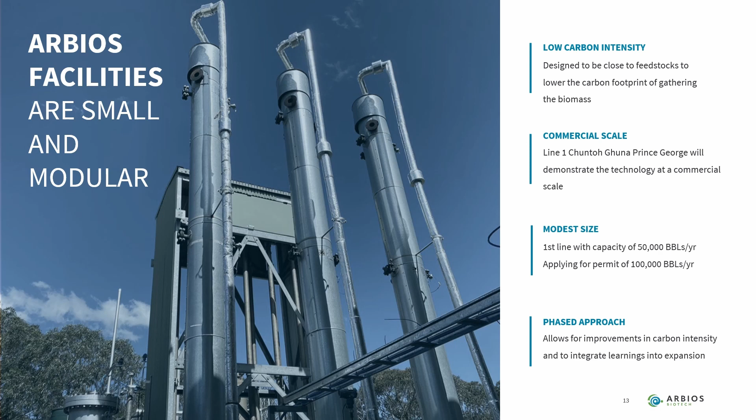The first section is the biomass storage and handling area. Here, there is a small biomass storage area, covered conveyors, screens, magnets, shredder, and a dryer. All of this equipment is focused to create a uniform quality feedstock.

The second section uses small boilers to produce supercritical water at high temperature and pressure, which is then combined with the feedstock into the Cat-HTR to convert this low-value biomass into a high-quality bio oil.

Then, in the third section, the produced bio oil and residual water are separated and stored. For this stage of the project, this is where our process will end. The stored bio oil will then be transported off-site for refining or further upgrading to produce biofuels that can be used as a drop-in fuel for transportation.

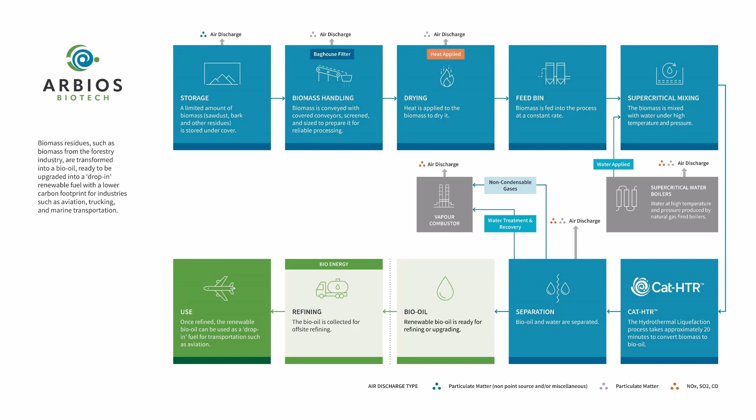And the reason for this presentation is to highlight that we are in the process of applying for an Air Discharge Permit with the BC Ministry of Environment and Climate Change Strategy. We submitted a preliminary application in March 2022 to initiate this application process.

Since then, we have made a number of process improvements, specifically related to controlling dust emissions, which will be reviewed in the Best Achievable Technology Assessment. And as such, our final application will have an updated discharge factor form.

It is worth noting that the process areas and core technology occupy a small section of the site, even with the completion of the planned expansion.

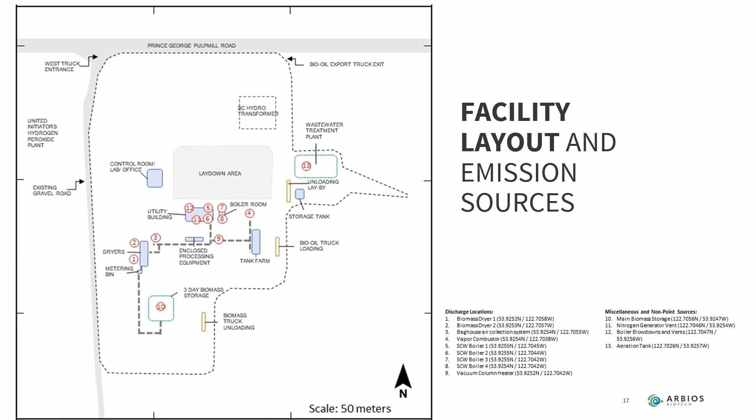At this point, I'll pass the presentation over to Francis, who will discuss the Best Achievable Technology Assessment that WSP has performed for Arbios. Thanks, Francis.

Thank you, Ian. I'm Francis Rees, and I manage WSP Canada's Air Quality and OHS group in BC and the Yukon. I'm going to provide a high-level walkthrough of the Best Achievable Technology, or BAT assessment that my team conducted for the Arbios facility.

A BAT assessment is sometimes required by the BC Ministry of Environment and Climate Change Strategy as a component of waste discharge permit applications.

BAT assessments look at the operation of a given facility and identify discharges of contaminants to the environment. For each discharge, the assessment reviews control technologies that have been proven in commercial application and whose risks are known. The assessment then determines which technology is best suited to meet waste discharge standards for protection of the environment and human health.

The assessments focus on 4 key assessment criteria: the feasibility of a given technology, given the design criteria and constraints of the facility; long-term reliability of the technology under a range of operating conditions; effectiveness of a technology at controlling contaminant levels; and cost effectiveness of the technology in terms of both cost per unit reduction and cost relative to overall facility capital and operating costs.

In performing the BAT assessments, we look at applications of control technology in other similar types of facilities, and we review what types of technologies are required in the permitting of similar facilities in BC. BAT assessments are often paired with air dispersion modeling assessments, which focus on predicting the impacts of discharges on the receiving environment. Brian will speak about the dispersion assessment conducted for the Arbios facility later on.

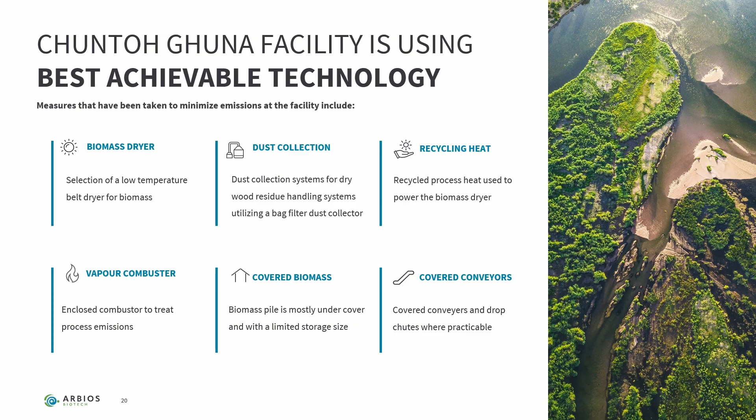In assessing the technologies reviewed on the previous slide, and assessing other operations within the facility, WSP undertook the assessment process discussed earlier, looking at the feasibility, reliability, effectiveness, and cost effectiveness of each control technology.

In approaching the handling of fugitive dust within the facility, WSP determined that rather than handling fugitive dust emissions with a particular technology, it is best practice to manage these emissions via a fugitive dust management plan, which includes a range of monitoring activities, triggers, and actions to manage dust emissions.

With respect to the handling of dried biomass, as mentioned on the previous slide, Arbios plan to employ a collection system for dust from dry biomass. The best achievable technology for handling such dry biomass particulate emissions is a bag filter dust collector, with a typical operating parameter of 20 milligrams per cubic meter or better in discharge concentration.

For the biomass dryers themselves, best achievable technology was determined to be a low temperature belt dryer, as previously indicated. In addition to minimizing emissions of particulate matter, this type of dryer also minimizes combustion emissions because no combustion of biomass or other fuel such as natural gas is required to perform the drying. The low temperatures of this drying approach will also minimize emissions of volatile organic compounds.

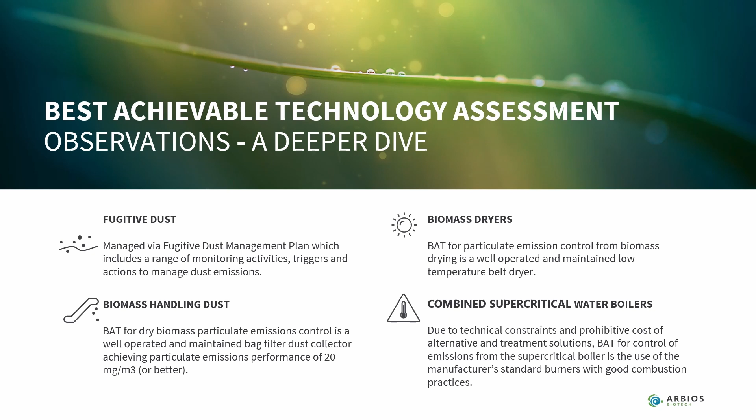The best achievable technology for the vacuum column heater, which is part of the separation process after the CAT HTR, is the use of manufacturer's standard low NOx burners together with good combustion practices.

For handling of vapors from the process, it was determined, based on the BC Oil and Gas Commission flaring and venting guideline as well as industry practices, that best achievable technology is the use of an enclosed combustor, with the important parameter that it must achieve greater than 99% destruction of the waste gases being combusted.

Leaks from process fittings, flanges, and valves within the facility will not be managed by one particular technology, but similar to fugitive dust, should be managed via a preventative maintenance program, which includes leak detection and repair of equipment that contains gases or high pressure liquids.

Finally, based on standard industry practice, best achievable technology for the control of emissions from wastewater treatment is the use of an anaerobic wastewater reactor, with all off gases from the reactor treated in the vapor combustor, as previously discussed.

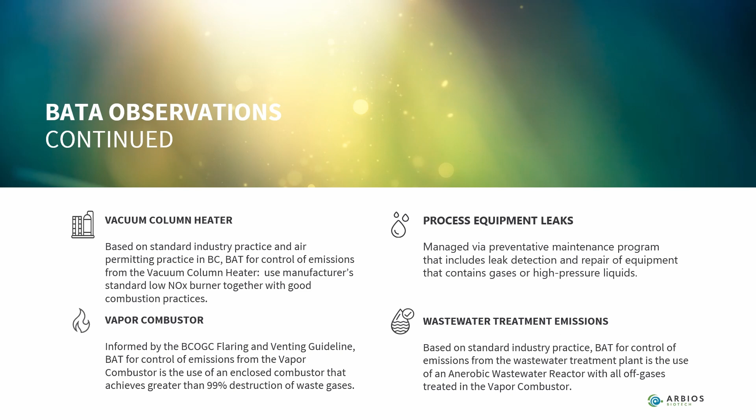That concludes my summary of the best achievable technology assessment. Now, I would like to pass the presentation over to Brian McEwen to discuss the air quality technical report.

Thank you, Francis. My name is Brian McEwen, and I led a technical team from Asenco to do an air quality assessment for the Chuntoh Ghuna facility.

This assessment is twofold. One is to assess the emissions expected from the facility, which we've already heard about from Francis - not just what the emission rates are, but also how they're released into the atmosphere. The second part is an atmospheric dispersion model, an approved government model that represents the weather and the release of contaminants into the air and how they transport and disperse.

So air dispersion modeling is what I'll be talking about mostly. Now, the model requires representation of the Chuntoh Ghuna facility emissions by themselves, and then addition of what's called a baseline or background air quality. This background air quality is taken from existing monitoring data, in this case the Plaza 400 monitoring station in Prince George.

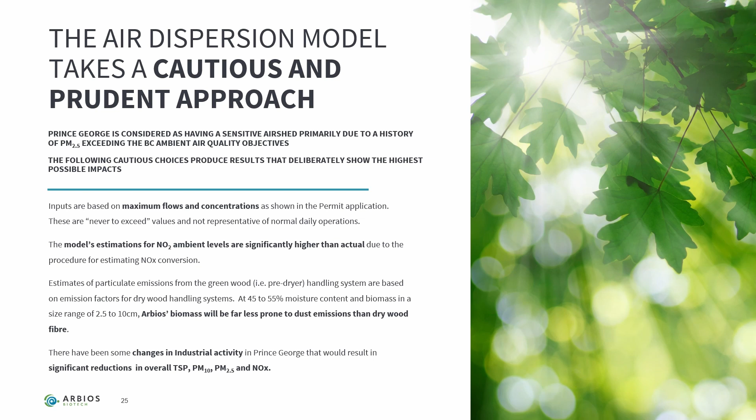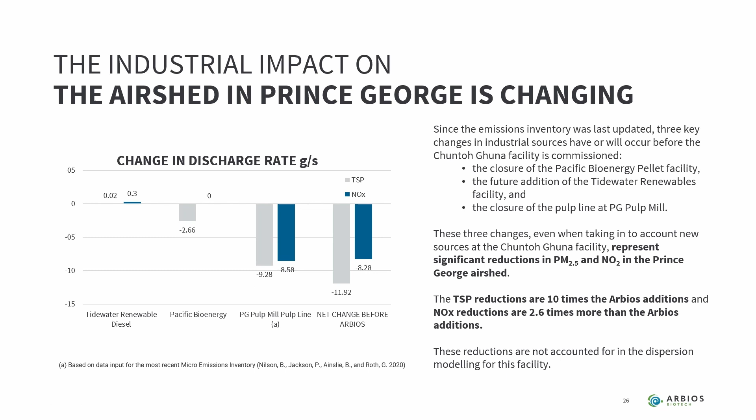So the net effect of recent changes in emissions is a decrease of almost 12 grams per second of particulate and over 8 grams per second of NOx. These reductions are quite a bit higher than the contributions from the Chuntoh Ghuna facility. So we'll talk a little bit about what effect we'd expect that to have in reality versus what the modeling implies.

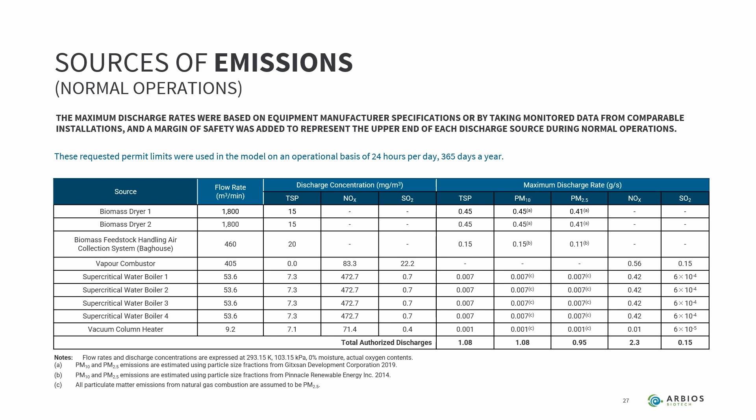So these are the emission rates that are put into the model, and the model simulates the advection, the movement of contaminants and dispersion of contaminants, leading to predictions of air quality concentrations.

Now, the emission sources are well understood in Prince George, in part because there's been a multi-year study conducted by the PG Air Group and facilitated and contributed to by UNBC. These emissions have been modeled as well. Now, the modeling that the university has done has not been a worst case or regulatory model like we've conducted here, but rather a modeling of the typical or the actual emissions.

So there are differences in what the UNBC model has predicted in past years compared to what our modeling here would imply. Notably, the UNBC model predicts lower concentrations because it does not use maximum permit level, never to be exceeded emission rates.

What's important to note here is that the contribution from the Chuntoh Ghuna facility at the maximum rates is about 2% of total emissions or less. And these are at the maximum emission rates. For typical emission rates, we'd be looking at more like half these numbers. So again, back to PM2.5, the typical PM2.5 emissions are expected to represent about 1% of the total PM2.5 emissions in the airshed.

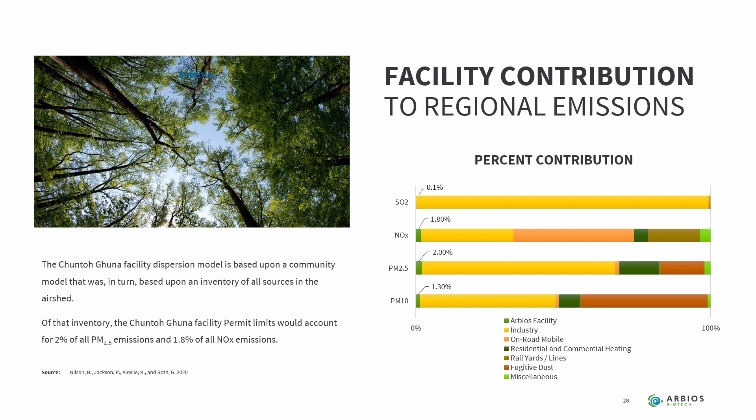The background levels that are added, and you'll see this coming up in our report as we go through the contaminants, the contribution of the facility tends to be rather low, but when the background is added, there can be predicted exceedances. This is because the background in some cases is quite high with respect to the objective.

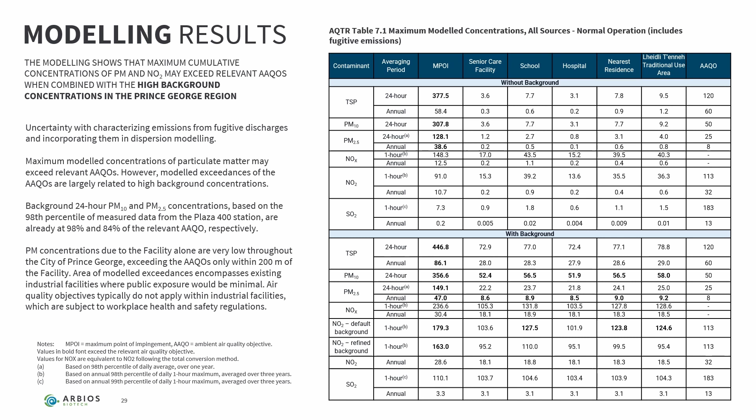If we run through the table, you can see that the predictions from the Chuntoh Ghuna facility alone are considerably lower than the objectives. Now, once we move down the table, adding background, you can see that there can be exceedances. PM10 in particular, you see that the model, when adding background, exceeds at the MPOI and also exceeds at the sensitive receptors. So in the assessment that we complete, we do identify that there are modeled exceedances, but these are largely caused by the high background levels in Prince George.

So as a result, with our assessment of PM10, we identify that there can be exceedances of the objectives within 200 meters of the facility, and this is due to the Chuntoh Ghuna emissions alone. But the ambient air quality objectives do not typically apply to industrial facility areas or industrial zoned lands. So public exposure to these emissions and air quality concentrations is expected to be minimal.

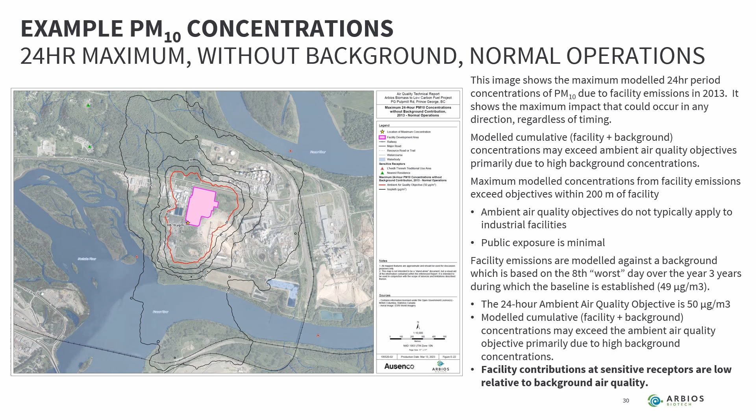When we add background, and again, the background PM10 is relatively high for Prince George at 49 micrograms per cubic meter, there can be exceedances, and these exceedances do occur at distances away from the facility. However, the facility contributions at sensitive receptors are low relative to the background air quality.

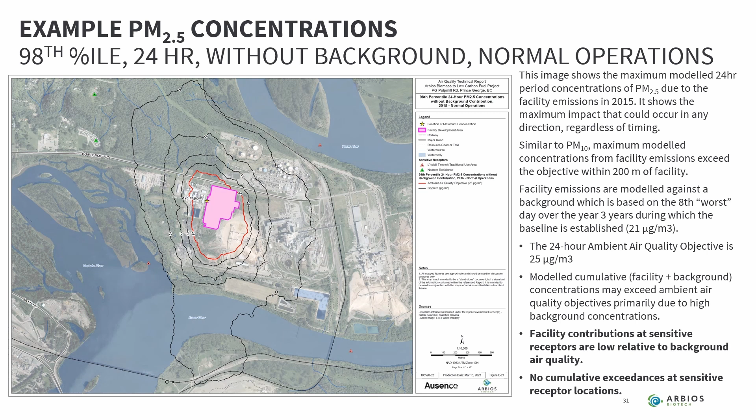Even when we add the background or baseline concentrations, we have no exceedances of government objectives at any sensitive receptor locations. So the concluding statements in terms of assessment of PM2.5 are that the facility contributions at sensitive receptors are low relative to background air quality, and there's no cumulative exceedances at sensitive receptor locations.

This figure shows the NO2, so the predicted NO2 concentrations from the modeling. As I mentioned earlier, the modeling of NO2 is a little more complicated because we have to deal with the chemical conversion of emitted nitrogen monoxide to nitrogen dioxide. This is a depiction of air quality concentrations due to both the Chuntoh Ghuna contributions and background.

This is because the Chuntoh Ghuna emissions on their own show no predicted exceedances at any location. Only when we add the background do we see that the model predicts there can be exceedances of the government objective. In this case, it's the 1 hour objective. There are no exceedances of the annual objective.

So for the 1 hour objective, the model predicts there can be exceedances near the facility on those industrial zoned lands, but also across the water on the hillside near the correctional facility. No exceedances are predicted at sensitive receptors.

So in reality, as we mentioned, this method of simulating the chemical conversion of NO to NO2, we expect that it's conservative. The model also tells us that the relatively high predictions only occur during poor dispersion conditions, typically viewed as inversion conditions in Prince George. Inversion conditions are when there's a layer of warm air above the surface, which inhibits the movement of air contaminants out of the airshed.

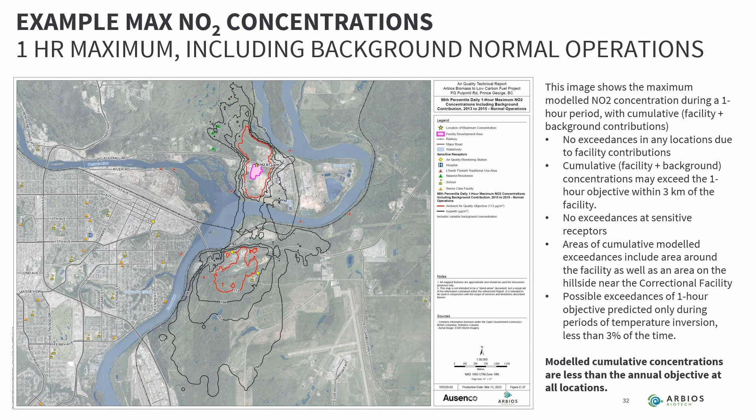So essentially what we're seeing here is a worst case impact of NO2 with the background contributions occurring during inversion conditions, which are expected about 2 to 3% of the time. These conditions occur often in the winter and usually in the late evening or early morning hours of the day.

This is a representation of the predicted concentrations of the Chuntoh Ghuna facility of PM 2.5 on top. This is hourly PM 2.5 and hourly NO2 on the bottom. And you can see as well what was actually measured during the 3-year simulation period.

So this is a comparison of air quality impacts, maximum air quality impacts from Chuntoh Ghuna over what was measured on these same days at Plaza 400. You can see that there's a small contribution from Chuntoh Ghuna at many hours of the year, and it doesn't change too much. It's a contribution of about 1 to 2 micrograms per cubic meter, and it remains quite low compared to what is actually measured at Plaza 400.

If we shift now to NO2, we don't see contribution at all hours of the 3 years here. This is because the contribution from Chuntoh Ghuna in terms of NO2 is very low at most hours of the year, except when these inversion conditions persist. That's why you see few red lines, but when they do exist, they can be higher.

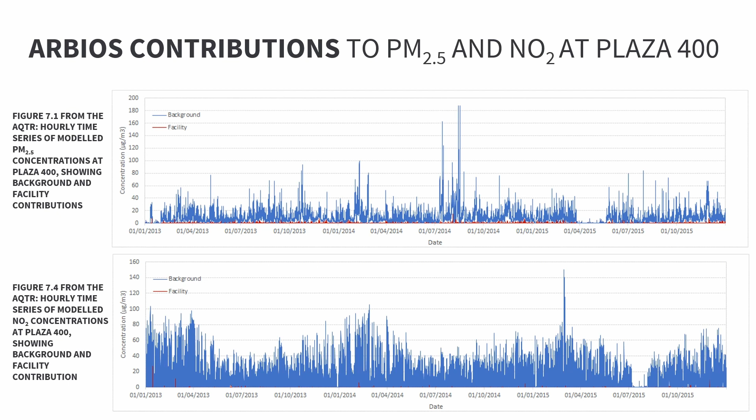As I mentioned, we expect that the contribution from Chuntoh Ghuna facility is overestimated by about a factor of 2. So we don't expect these contributions to materialize, but it's important to understand that the significant contributions that could occur from the facility emissions are quite rare.

In conclusion, we are able to make a confident statement that the facility is not expected to adversely affect air quality in Prince George. It has to be understood that the assessment we did is a worst case assessment, where we look at emission rates from the facility that are not typical. They're emission rates that are never expected to be met or exceeded.

We're also adding a worst case contribution from all other industrial sources, industrial, commercial, and residential sources in the airshed. And we've seen that already there have been significant reductions in emissions of particulate and NOx, and these reductions are considerably higher in magnitude than the contributions expected from Chuntoh Ghuna.

We also looked at other air contaminants that I didn't address today, SO2 being a significant one. The reason I didn't talk about these is because the modeling clearly shows that the risk of exceedance of any air quality objectives is very, very low. The model predicted no exceedances of any objectives of SO2, and it was the same for other air contaminants as well, notably carbon monoxide.

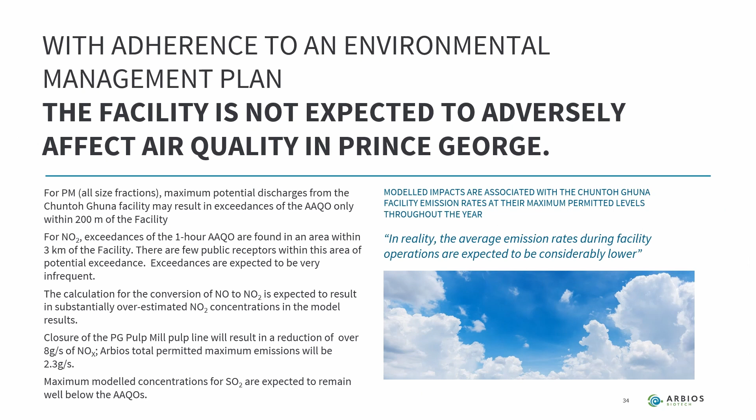Thank you, Brian. Highlighting the next steps in the Air Discharge Permit Application, there is a 30-day notification period on the permit application. After the notification period, we will finalize our submission to the British Columbia Ministry of Environment and Climate Change Strategy, their Industrial Waste Authorization Division. The ministry will then review the application.